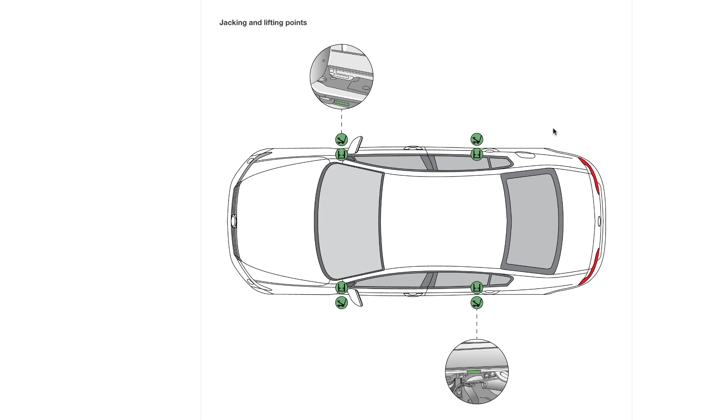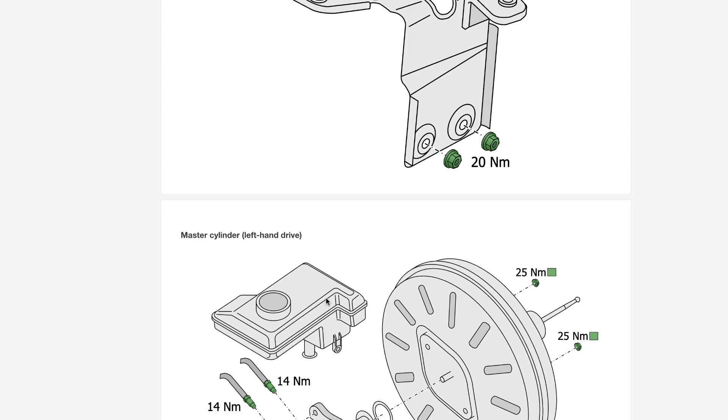Haynes AutoFix is the most advanced online repair tool yet for motoring DIY tasks and covers 9 out of 10 cars on the road. This all-new digital product contains more features and is more technically advanced than any other product in the history of Haynes. AutoFix isn't based upon a strip down and rebuild, but contains other features that a Haynes Manual has never included, such as an interactive fault finder and videos.

This video will give you a brief introduction to AutoFix to show you how you can use it to work on your car. Your AutoFix experience may well begin with the fault finder, which can help you diagnose and cure more than 400 common vehicle issues. In this example, we're trying to find out what could be causing our Skoda Roomster's engine to overheat. Simply click on Start Your Search and choose your component, or use the search bar to narrow down the issue.

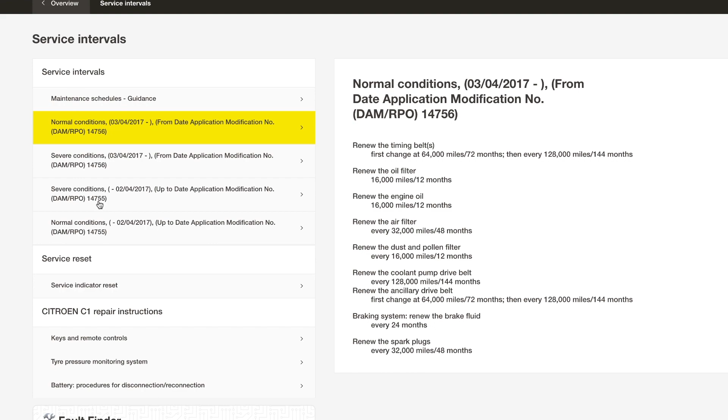The first section in AutoFix is Service Intervals. Use this to find out when to service your car. In this example, for a Citroen C1, you can see when serviceable parts such as the engine oil and filter, air filter and spark plugs should be replaced.

Once you've carried out a service, you'll need to reset the service indicator if required. So tap on Service Indicator Reset to be shown how to do this. There may be more than one method. We'll show you all of the options available for your model.

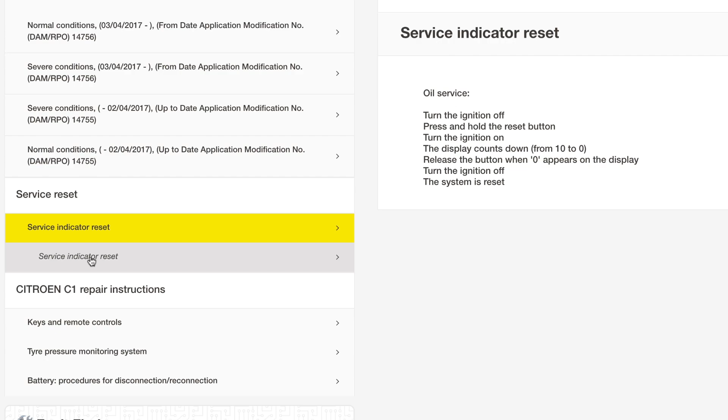The maintenance and repair section of AutoFix covers the vehicle's major systems, with full rundowns of major components such as the engine, transmission, brake system, electrical system and more. These are general guides that aren't specific to your vehicle. In this example, we want to replace the battery, so we tap on the electrical system menu.

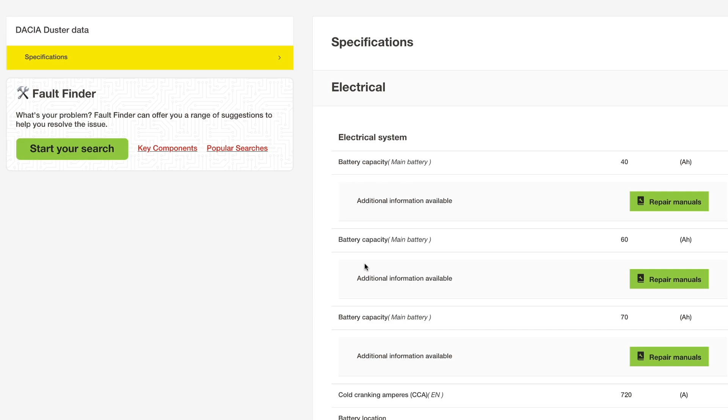Now tap on Battery to be taken through the battery replacement procedure, which includes specifications. AutoFix also shows you each task's level of difficulty, provides tips to make the task easier, identifies common problems, includes the tools you'll require for each task, and highlights other tasks related to this procedure.

Next, let's take a look at a different car and move on to the Specifications main menu. We're trying to find out a torque rating for a bolt. So with the torque settings submenu selected, you'll find a variety of manufacturer recommended measurements for your make and model. In this example, for a DS4, you can see torque ratings for many areas of the vehicle, including engine bolts, drain plugs, spark plugs, transmission, wheel bolts and so on.

The only time we expect to see a warning light briefly pop up on the dashboard is when we turn on the engine. But if a light stays on, or if something flashes up when you're on the move, you'll need to know what it means as soon as possible, which is why the AutoFix warning lights and indicators section is invaluable. For example, what does this curly orange icon mean? It's the diesel engine preheating in progress light, and AutoFix tells us to wait until the light goes out before starting the engine immediately. Note that some icons are red and others are amber. Red means you should stop and investigate the issue immediately, while amber is an advisory signal.

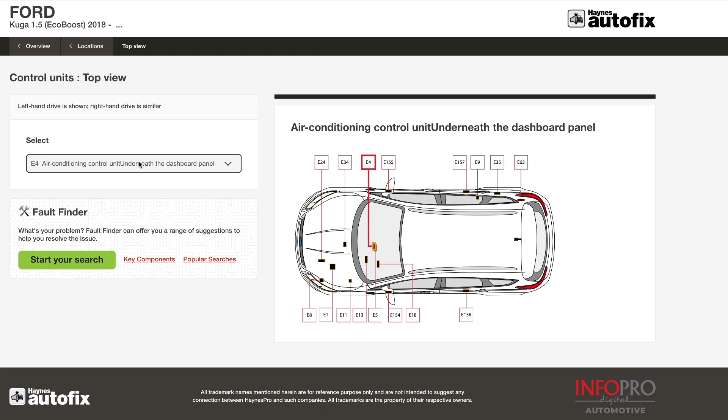Locations is the next AutoFix section. It's useful when you're trying to find a specific component, such as an air conditioning control unit, the OBD connector, or the fuse boxes. For example, here are the grounding points for a Ford Kuga 1.5 EcoBoost. Here's one of the engine compartment fuse boxes, and here's a front view of the engine with solenoids, ignition modules and temperature sensors highlighted.

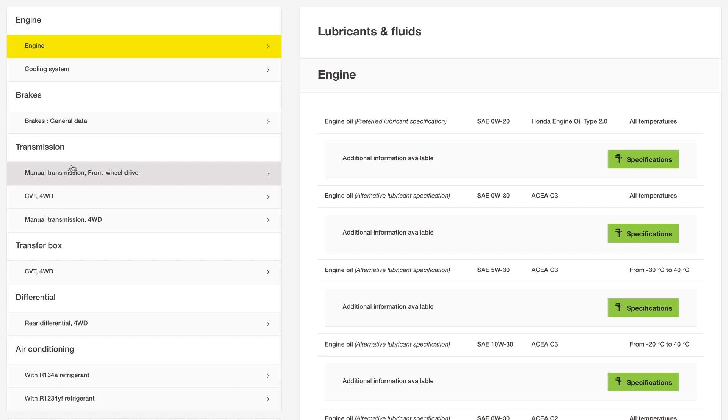The next AutoFix menu shows lubricants and fluids for a variety of serviceable parts. Here we're showing a petrol-engined Honda CR-V, and you can see that the fluids are listed according to component, such as engine, brakes, transmission and air conditioning. Tap on each submenu and you'll find the exact specification for your vehicle. In some cases, you'll also find capacities where relevant.

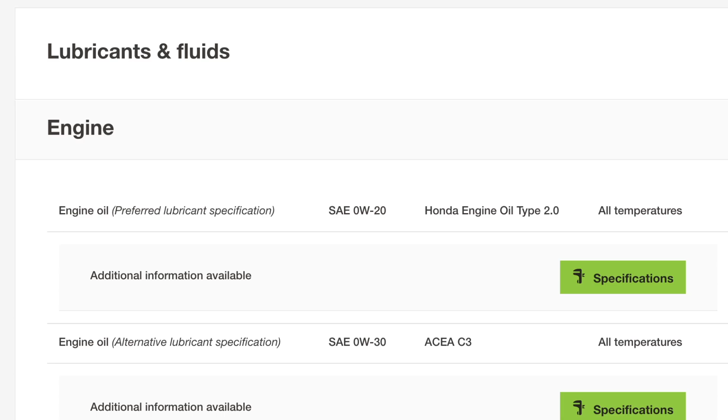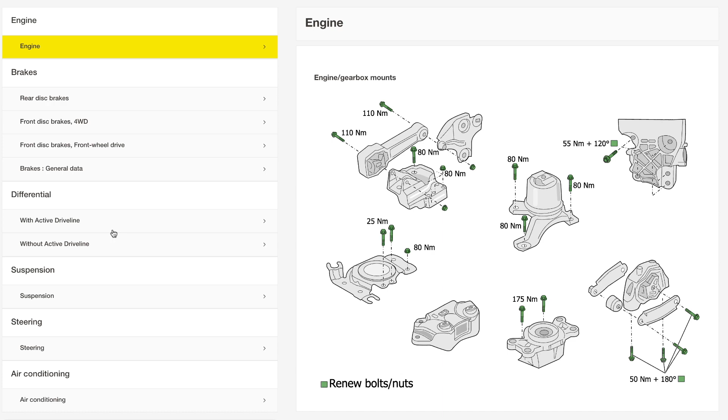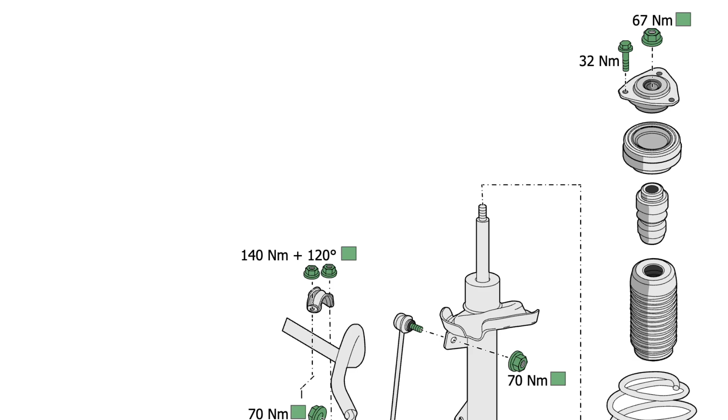It's important to familiarise yourself with a task before you carry it out and throughout the procedure, and the technical drawings section of AutoFix is the perfect way to do that. Say, for example, you want to replace the front shock absorbers on a Land Rover Discovery Sport. Tap on the suspension submenu and you'll be presented with an exploded diagram that shows all of the suspension components. You'll also find torque settings for each bolt and whether they need to be renewed.

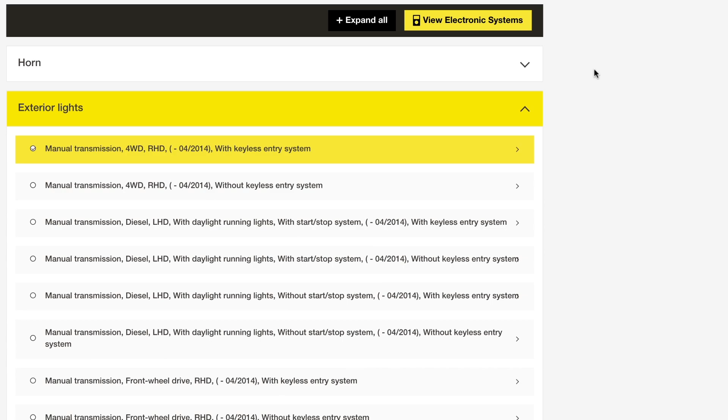AutoFix features comprehensive wiring diagrams and makes it easy to find the component you're looking for. Click through the submenus for your car. In this case, we're looking at a Nissan Juke, and you'll be taken to a specific part of your car's wiring. Here, we've selected the right headlight, and you'll notice that the relevant section is highlighted within a red box. When you select another component, the wiring diagram automatically recenters.

AutoFix is the most advanced online repair product yet for motoring DIY tasks. Got a problem? AutoFix it.